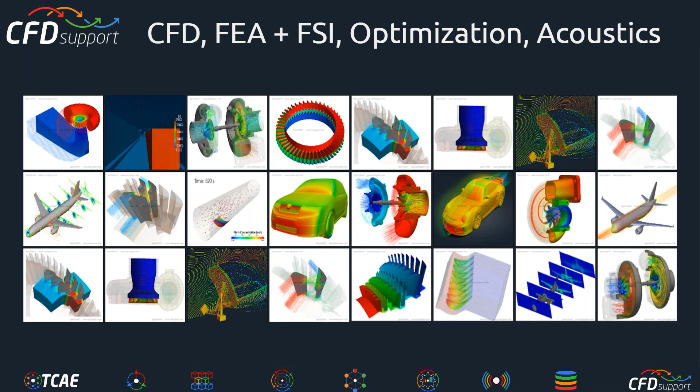So definitely, you are in the right place here if you want to follow some of CFD, FEA, FSI, optimization, and acoustic simulations. Today's webinar is dedicated to optimization. It's a specific field where typically a lot of simulations are run, and the best results or the best lessons are taken out of it.

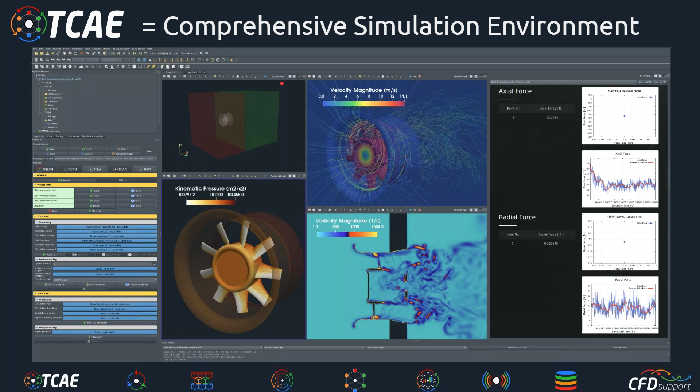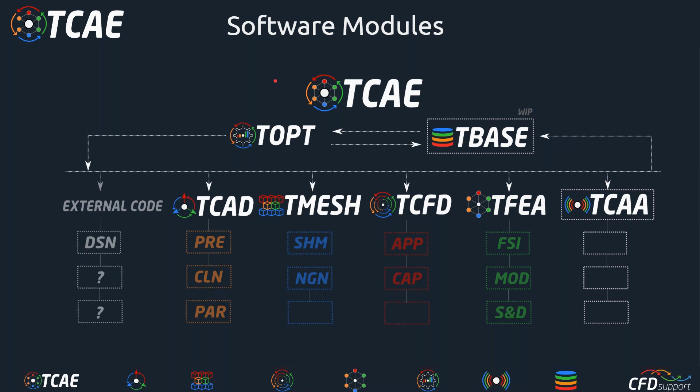Our flagship product, the software, is called TCAE. We develop it here, and we provide it to the users. It's a comprehensive simulation environment, which is basically a tool, a CFD code, which allows all these kinds of simulations. It consists of several software modules, and the modules can communicate with each other and provide everyone a very flexible set of tools.

Its benefit is definitely that every user can set the workflow which fits his skills, experience, and resources to deliver the results in very high quality, and it's very flexible. Software is unlimited. There are no limitations on the number of users, job cores, hardware installations. Users can scale their resources to the fullest, and there's a wide range of licensing options and ways of using this software. So it's very flexible also in these terms.

As already mentioned, it's focused on turbomachinery applications and external aerodynamics. That allows the software to be accurate and really useful, because it's not a software for everything. It's dedicated to specific fields where it can be very efficient. It's accurate, it's automated, and it's very modern software, because it was created with the intention to give the best to the users in terms of these features.

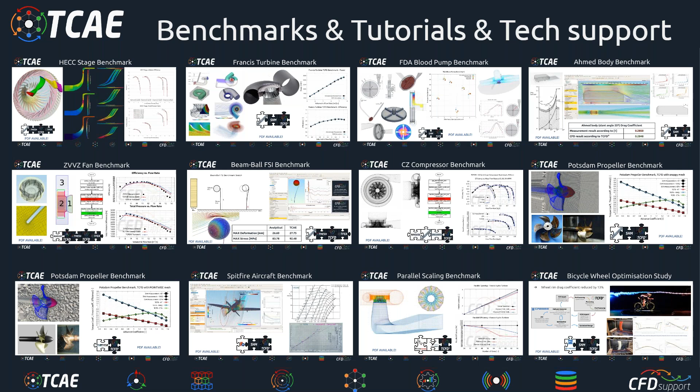There are a lot of benchmarks based on real projects we did in the past with real customers. We masked the details, and we were allowed to use them as benchmarks. We compare the simulation data with real physical measurements. That's very important because all the users care about accuracy. There are a lot of tutorials available, and we have very good technical support, which is our specific focus, and it's in the name of the company after all.

The software can be used for remote computing very well. It can be used on a laptop, PC, desktop, cluster, or cloud. It can be used remotely from home or from the office in Windows or in Linux. It has unique client-server options. It can be run locally but simulated on the server. So it's very modern in these terms.

It's based on open source. It's very important that we do not develop everything from scratch. We use the important open source pieces available in the market. We have mastered the ability to process and integrate these open sources into our simulation environment. And we have spent many years on top of open source projects. So this already is a value itself, because a lot of effort has been spent to deliver this software.

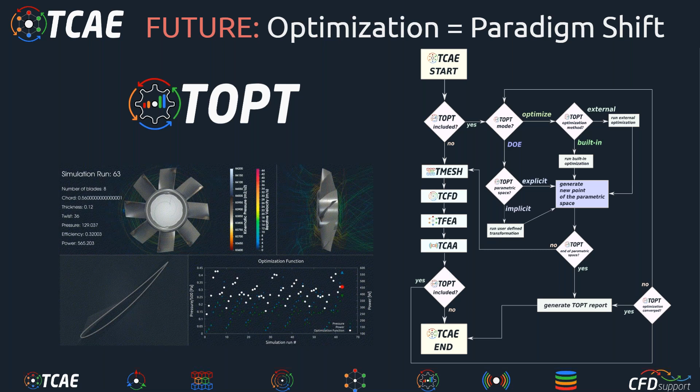Currently, the version is 24.03. The latest version is version 2 of 24.03, and we will release it very soon, perhaps next week. For the future, we have a couple of goals. We will definitely focus on optimization and develop it further, and we believe it's a very promising feature for the future.

We will also focus on acoustic simulations. The module will be developed further. It's being developed very quickly, and it's again very promising. In the next webinar, we will introduce the new benchmark, which is again very useful and opens the door for a lot of new simulations of fan acoustics.

And lastly, we are developing a new simulation software module called T-Base, which will help create large databases of results and allow users to employ machine learning and create their own surrogate models. It's very promising, and we will introduce it a little bit later.

Okay, so today's topic is optimization. I'll say a little bit about what I think is important about optimization in CAE. We believe optimization is pretty much a paradigm shift, a really big change throughout the field, because in the past it was basically a trial and error method. We created the simulation, ran it, and looked at the results.

This was an iterative process. We changed one parameter, two parameters, looked at the results, and then we hesitated about what the cost of the change was, etc. So it was a relatively painful process, pretty manual, and we sometimes call it the trial and error method. We tried something and saw what was good or not good, and then we decided the next step.

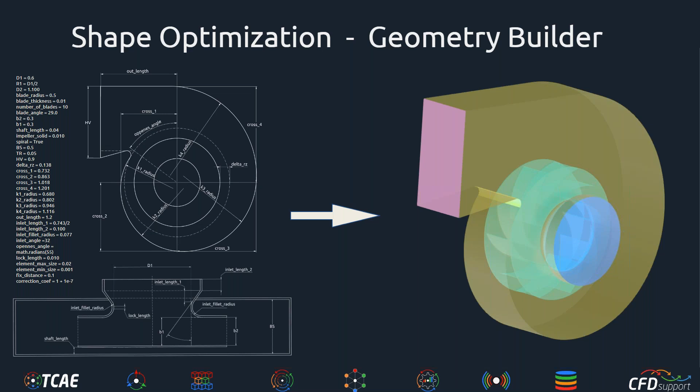That surface needs to be created somehow, and it needs to be discussed a little bit in parallel, because every engineering office, every research department, has different pictures and parameters, so it's impossible to generalize. The geometry builder, if needed—and for most optimization loops it is needed—has to be discussed in parallel with the optimization project.

A little disclaimer here: any optimization project brings quite a lot of new complexity into an already complex problem. So it's not something you begin with if you're just starting CFD or FEA simulations. Optimization should come on stage sometime later, when you already know how to run your simulations and are confident about your results. Then optimization makes sense to run in full scale. It's relatively complex and needs some experience involved.

For optimization, in our software environment, the TOPT module is responsible, which works in several modes. It's a software module that adds to the standard workflow—typically meshing and CFD simulation—and that's pretty much it. It adds additional steps. It can create a simulation loop where a lot of simulations are done, and it allows users to run simulations in several modes.

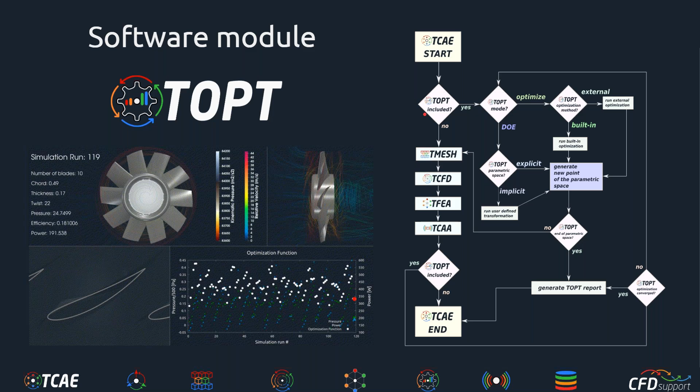We have—perhaps we'll talk about it later—two optimization methods. The first is called the golden-section search algorithm; there are references for it, and it's relatively simple and quick. The other optimization method is called DIRECT, and again the theory is available. It's an alternative, more complex, takes more time, but it can handle more wild optimization functions.

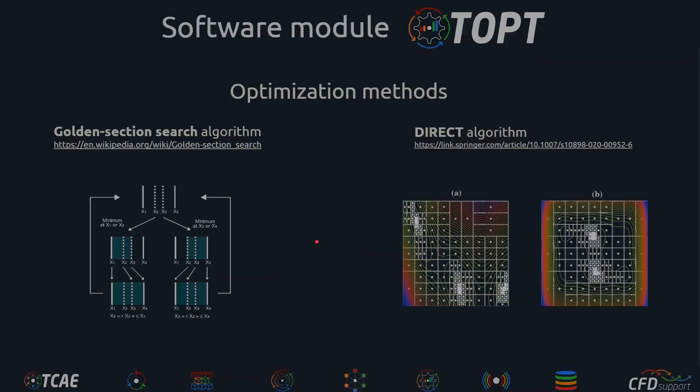Okay, so we did a couple of case studies of this optimization workflow. The first one we'd like to talk about is also available on our website, with all the details. So I will just mention what I find important about it.

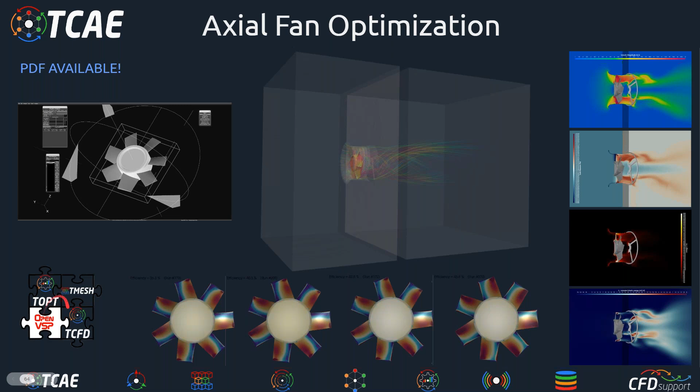It's axial fan optimization. We created a simple geometry builder in OpenVSP, so you can send the parameters there. Actually, TOPT can do that, but you can also do it manually. And OpenVSP brings back the surface geometry.

Based on this geometry builder, we created a loop which allows us to run simulations like this. So this is the loop for this particular case study. We start the simulation, the first initial mesh is created for the baseline simulation, then the simulation is done, and the optimizer decides what will be next. Based on the rules we preset, it generates the new geometry, creates the mesh, and runs the new simulation.

That's very important, that's why it's simulation driven, right? Because based on the previous results, the next set of parameters is decided. A new point in what we call parametric space is created, and then again and again - it's a results driven, simulation driven optimization being run.

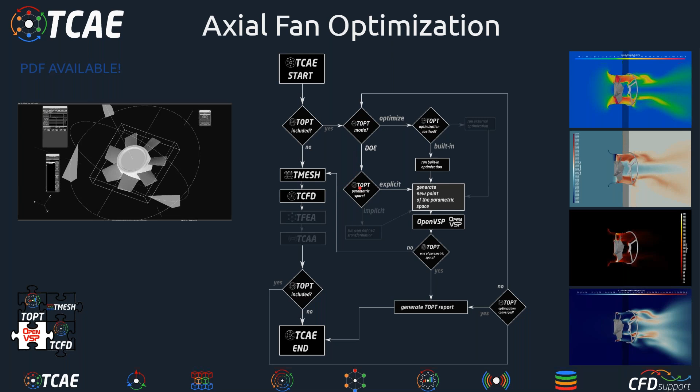And as a result, here's a little animation. We ran something like 300, maybe 400 simulations with, I think, five parameters that changed within a certain bandwidth, and the simulation ran and iterated towards the best - I think it was the efficiency. The efficiency was the goal.

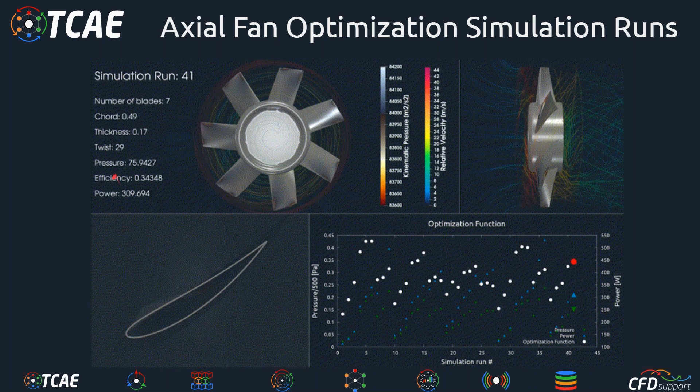And we did a similar case study with a centrifugal fan. I'm not going to go into the details, but I'll just show a little animation of how the simulation can be visualized at the end. Every little white point is a single simulation. In the beginning, the optimization engine is exploring the parametric space, and then it starts the real optimization, iterating towards the best efficiency point, which, by the way, in turbomachinery is very often the optimization function.

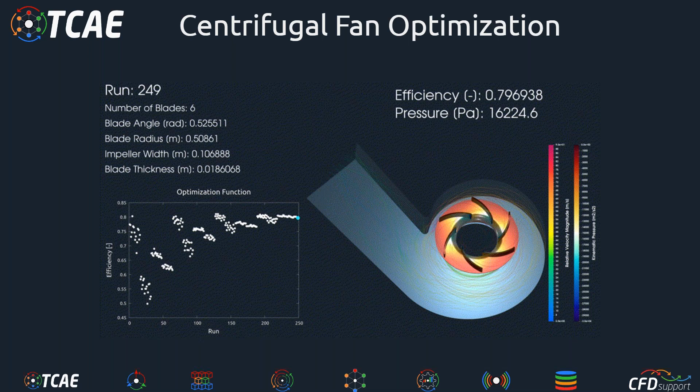The objective function is set because efficiency is something we look for in most turbomachinery applications. So, centrifugal fan, and similarly we did this for the blade propeller of a drone. I guess this was - well, Salome, I'm not sure, maybe it was still OpenVSP again. The geometry builder created it - yeah, it was OpenVSP for sure. It created the geometry, and again, pretty much the same story: it iterated towards the best efficiency.

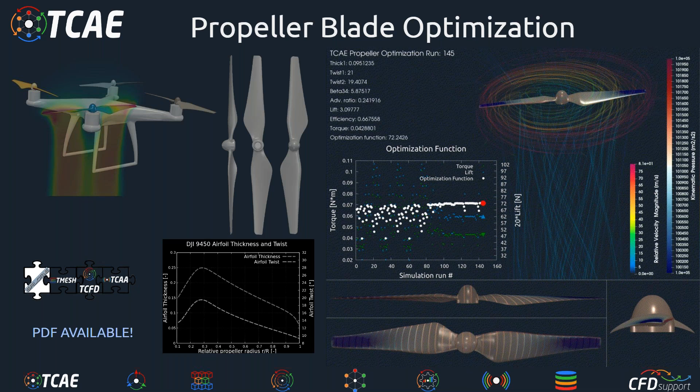We also have one example - I don't know, maybe Radek will talk about it or not. Anyway, it's not necessary to run the optimization loop over new geometries; you can also be looking for something else. For example, in this case we created a workflow where we were looking for the maximum lift coefficient of an airfoil. For this selected airfoil, what was changing was not the geometry but the angle of attack. So we were looking for the angle of attack for which the lift coefficient is highest, maximal. It's as simple as this.

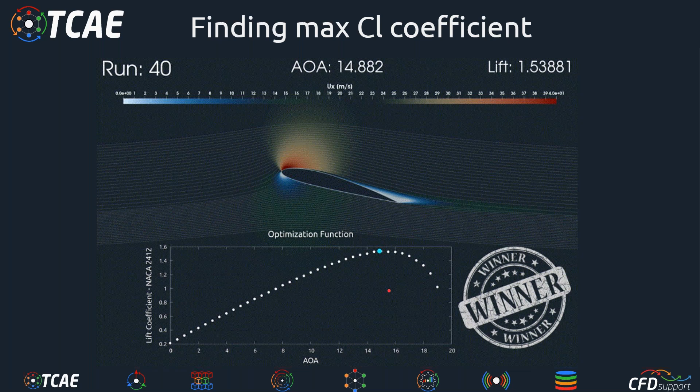I guess this is still the DOE, and now it starts iterating around the design point candidates, and then it determines the winning design, or the angle of attack.

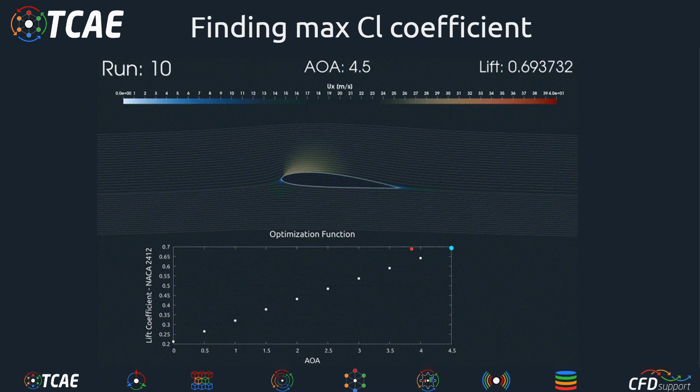Before I switch the presentation to Radek, I'll finish this general part with an idea that resonates with me in the recent period: the technology - here I mean the software, the workflow, the scripts, and everything you use - is just 40% of success. It's the smaller part of the success, or of the quality of the results you produce in any CAE project.

The rest is knowledge and effort. Knowledge is skills and experience. Your effort is your patience, your dedication. That's the bigger and far more important part in any project, in terms of quality of results and success. It's how you use it, with what effort and what knowledge - that's definitely more important than the technology. Technology is great to have, but it's the smaller part of the business. That's what I'm sure of.

Okay, I'll definitely stop here and switch the presentation over to Radek. Let me see if he's still there. Yeah, I'm still here. That's great, Radek. The stage is yours - we can see your screen.

Yes, perfect, thank you. So Luboš showed us several examples we did in the past, all showing some possibilities of what can be achieved with TCAE, and particularly the optimization tool. Now I would like to show you some practical examples, so I took two examples.

One is the simpler optimization where you do not have any geometry builder. So this will be just simple optimization of flow parameters or CFD parameters itself. So it doesn't require any external tool for geometry generation or any parametric model. So then we will show how to enable the optimization and how the optimization module TOpt looks like.

And then on a simple example, we will show what should be managed or changed when we would like to do the geometry optimization. So we will not go for a general or complex example like radial fans, pumps or whatever, because I think Luboš mentioned it, but I would like to repeat and emphasize that before you go for the optimization, you need to master the first step, so the mesh generation and CFD setup.

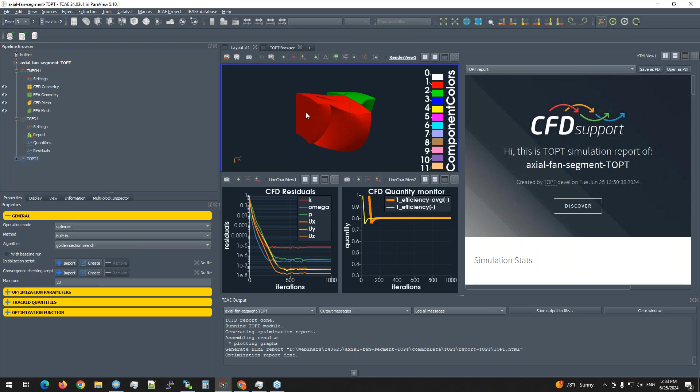So first of all, we will show the example of the simple axial fan geometry in a segment shape. So we just simulate the segment of the rotor and stator part of the axial fan. And here we would like to, for example, find the best efficiency not only for the range of flow rate, but also for the range of RPMs. So this cannot be achieved easily by DOE or by our guesses of the parameters, always checking the efficiency.

So let's look how to find the best efficiency point for two parameters, flow rate and RPM, so speed of the rotor. So at the beginning, you need to have TMesh and TCAE perfectly set up. So you need to run the simulation several times and check the mesh parameters. When the mesh is okay, then you go for the CFD simulation setup, which is the same as for all the other setups we presented in our previous webinars.

So you set the standard parameters, and then you focus on the optimization. So mainly you need to focus on boundary conditions. So if you would like to go for combining the volumetric flow rate and RPMs, you need to have at least these two parameters set following the optimization. So we have some base RPMs set in the standard CFD simulation, and then we have the volumetric boundary conditions.

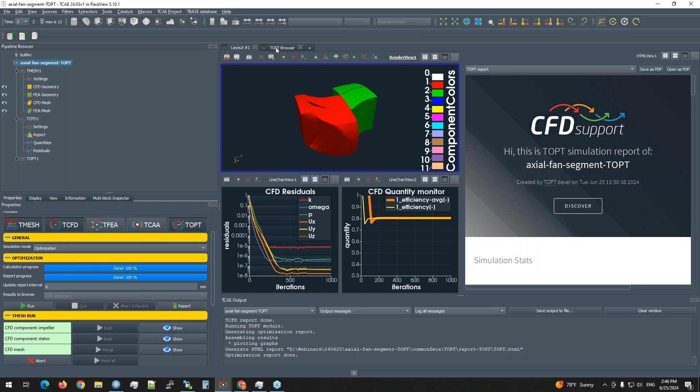And then when you run it, you simply run the optimization by the run all button, and then every step, every simulation is run, and during the optimization loop, you can follow every result you will have. So after every parametric point in the space is evaluated, you can check the results, or even you can generate the report which will show you the current state of the optimization.

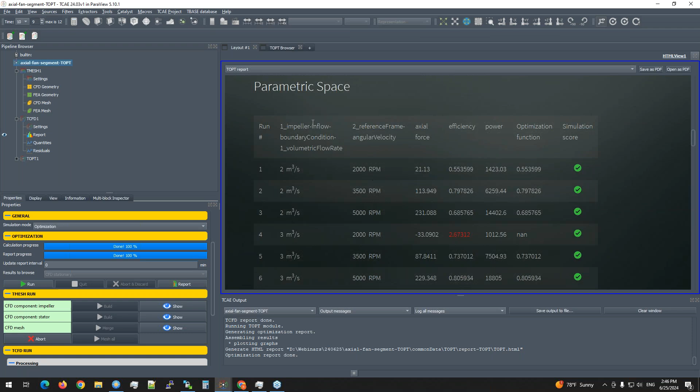So you can then read how many runs were run and all the results for each point in the parametric space. And for example, here the 4th point with the RPMs 2000 and the volumetric flow rate of 3 cubic meters, we have the efficiency more than 2. The axial force is also negative, so it shows us that this combination of parameters is out of the working range of the axial fan, and basically this point is excluded from the optimization loop, and the same holds for the other points.

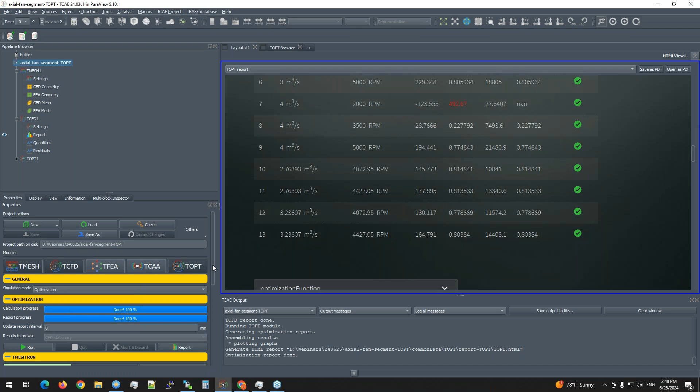The first 9 points, as we can see, were simulated with the DOE, and then from the 10th point, the optimization loop starts and it iterates towards hopefully the best efficiency point, because golden section search looks for the local maximum. So it depends again on the wildness of the optimization function, what you would like to use. With golden section search, you save time because it's simpler, but if the optimization function is expected to have several local maxima, then you need to go for the more advanced optimization algorithm.

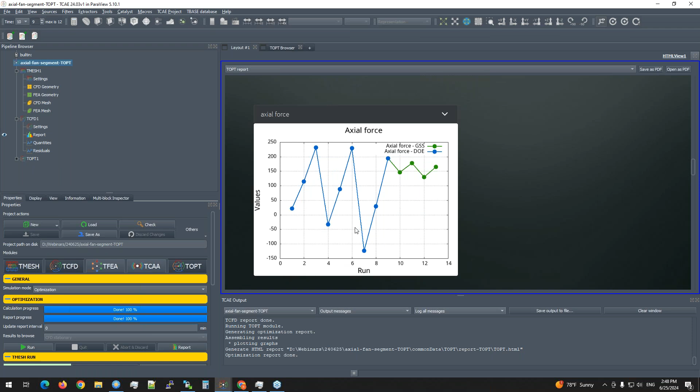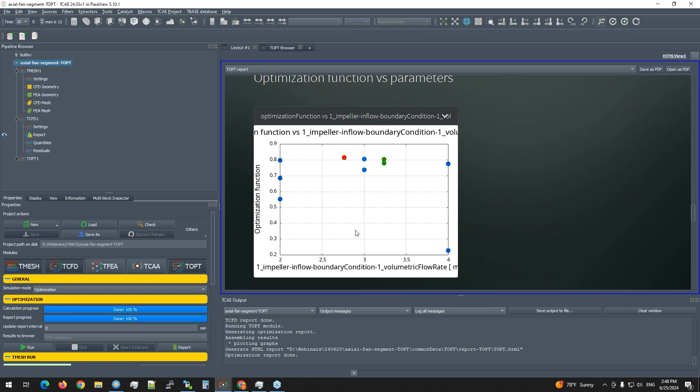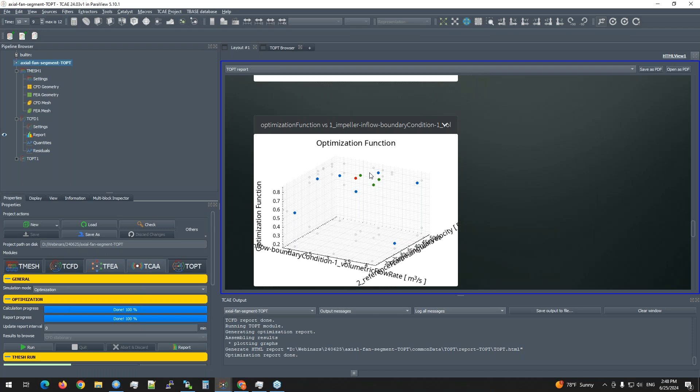And at the end, you can follow your tracked quantities and optimization function for each simulation run, and of course you have a summary of the best efficiency point, so which point was the best one, and the combination of the parameters and resulting tracked quantities. And then you can follow the graphs of each parameter with respect to the tracked or optimization function. And you can also see these 3D graphs, so the dependency of two parameters.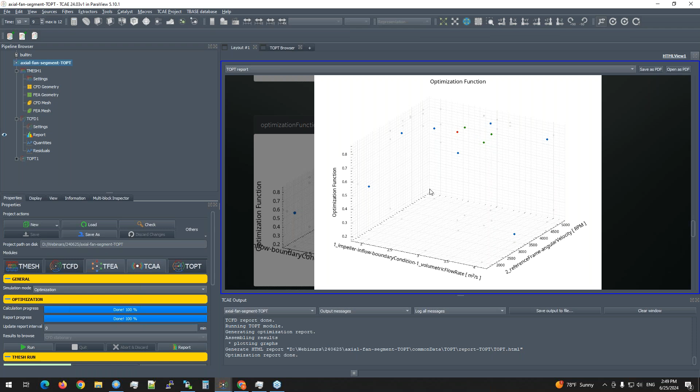If I enlarge it, we have here angular velocity, here we have volumetric flow rate and the values of the optimization function. The green dots are the optimization results, the blue ones are the results of DOE, and the red one is the best efficiency point. Yeah, and this way you can optimize what you want with a simple setup of the optimization module.

Okay, so let's move to the more complex optimization. So here we have again a simple example of geometry optimization. We have a simple bent pipe with 3 cross sections, and we can adjust the radiuses of these 3 cross sections of the piping system. This is one of the best points, but if you choose another simulation point, there are 3 cross sections, as I said, and we can manage the radiuses. And the optimization is set to find the best efficiency, which is just the lowest pressure drop for the flow in this pipe.

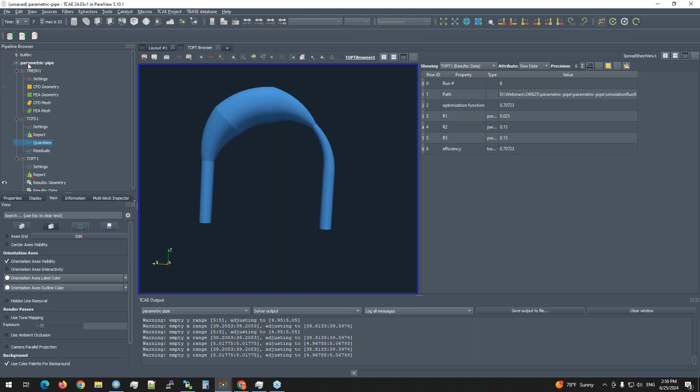So again, you start with a simple setup of the T-mesh and TCFD modules. You typically load some initial geometry of the piping system. You set the mesh, you adjust the CFD parameters you would like to follow. I think here we have the flow rate or inlet velocity, it doesn't matter. And then in T-opt, we would like to connect some kind of external tool which generates these variations of geometries based on these three parameters.

So just to show you how it looks, if I go to the webinars, today's webinar, and here is the parametric pipe. So typically you have a folder with the external tool. Here it is a simple Python script which reads the 3 values of the radiuses, and this Python script creates the STLs with the given shape.

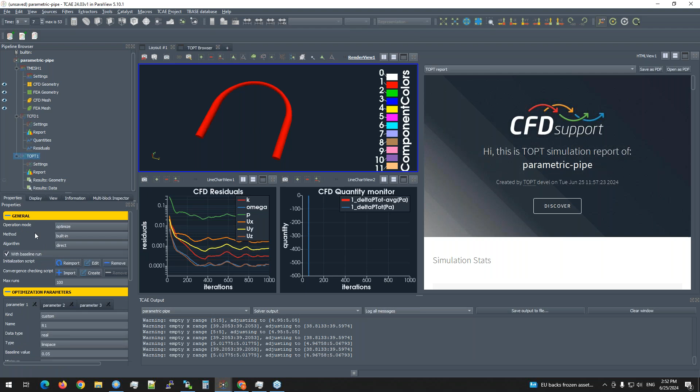So this script reads the 3 parameters of the cross sections R1, R2, R3, and basically generates the STL here into this folder. So it generates the inlet, outlet, wall, and even for optimization based on the finite element method, it also generates a solid for the piping system. But this is not part of this example. So again, if you go to the T-opt module, you can choose your operation mode, method, and algorithm. So here, as an example, we have a direct.

Here you have the possibility to include the baseline run, which is typical when you start an optimization where you would like to optimize some existing geometry. So the existing geometry is the initial state, and the other results will be compared with respect to the baseline run. So for example, you have some pump design, and you need to improve it.

So you have this baseline geometry, and the geometry builder will then adjust the parameters by some relative values to optimize your current baseline run. So therefore it's important to have the information about the CFD parameters of your initial state.

So this is it. And what's new compared to the previous example is that you need to create the initialization script, which connects the optimization parameters with the external tool, and runs the external tool to generate a new set of geometries, to create a computational domain from the new set of geometries and run the CFD simulation.

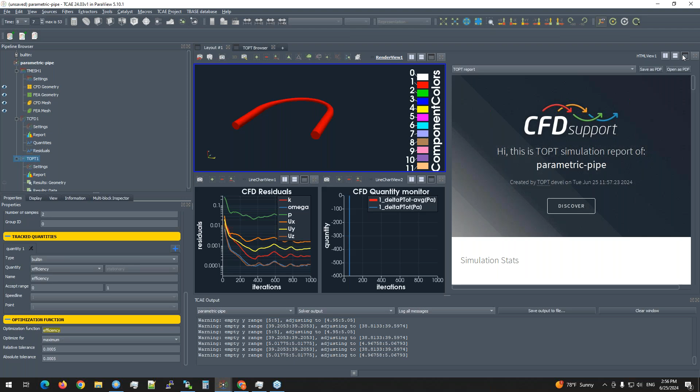And then again you define the tracked quantities like efficiency here, for example, or the total pressure difference. You set the accept range, you set the optimization function, and again run the loop, and as a result you will see the TOpt simulation report, where you see how many runs were run, and all the information about the parametric space, so about the baseline and all the other results depending on the combination of your parameters.

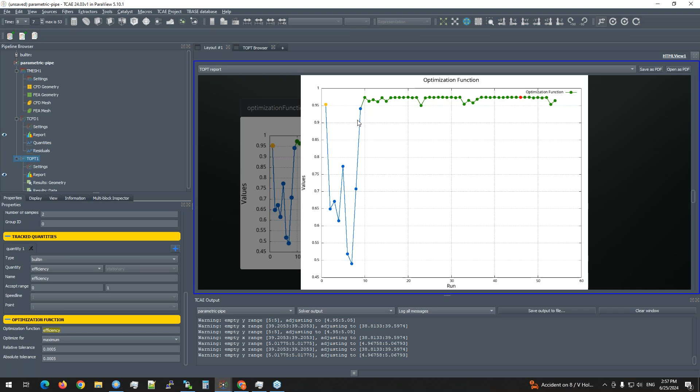And at the end you will see some kind of dependency like this, and of course you will find the best efficiency point, and then you can explore the parametric space and the influence of each parameter on the optimization function. And then, based on the results, you can decide what will be the next step, or if you are done with the optimization.

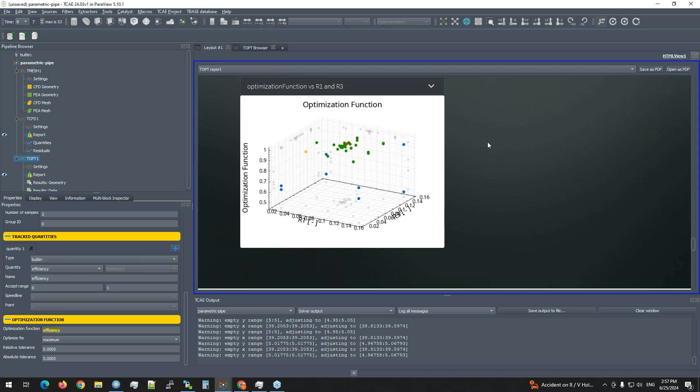So these are the main principles, and basically all the other applications you can find on our web pages, like this centrifugal fan or axial fan optimization, which Lubos already presented. So the principles are very much the same. The connection is done with the external tool, and then you run the optimization in a loop.

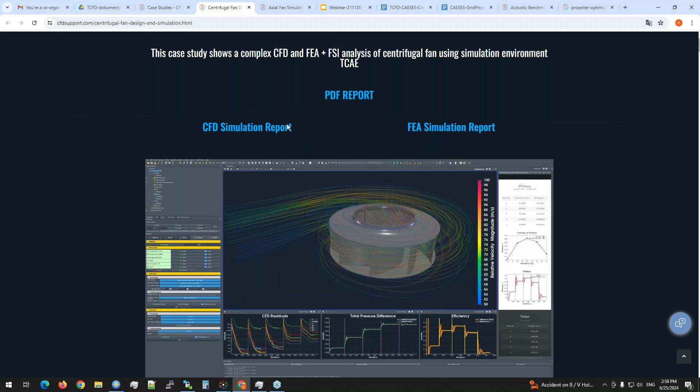So we have run several such optimizations in the past. Like for this centrifugal fan, we have this axial fan geometry variation and optimization. We also did some kind of optimization with CF Turbo, to optimize the radial pump. So this was a pretty extended optimization project with hundreds of loops, really to explore the parametric space based on, I think, 5 or 6 parameters.

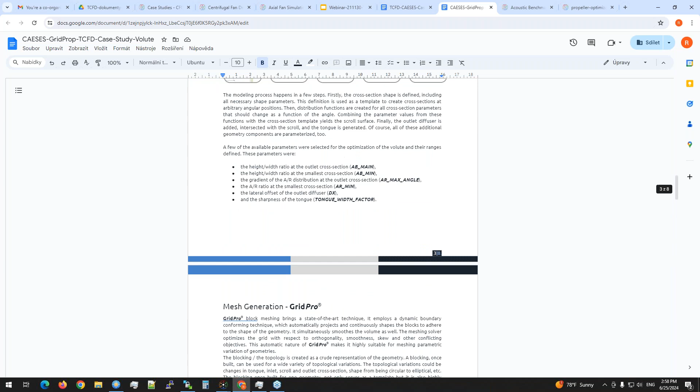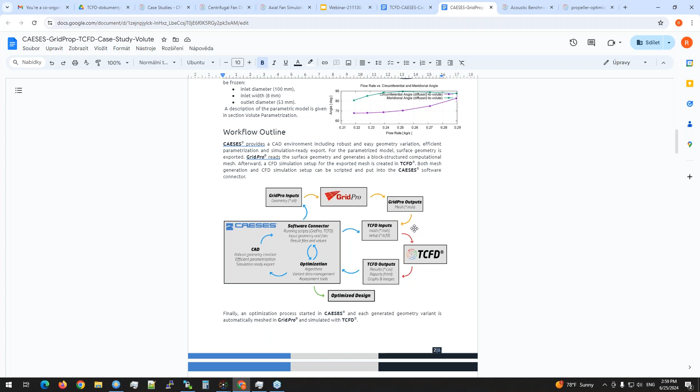We have some joint projects with the Friendship Systems, and also together with Friendship Systems and GridPro, which proves how TCFD is flexible to be incorporated into any workflow, and really to combine several external tools for some really advanced applications with higher added value for all the parts of the workflow.

And the last one, yeah, we also did some acoustics simulation, for example for the DJI propeller, and on this we also do the optimization based on the geometry, but this can be also for the future. We are planning to have some kind of optimization with connection to the acoustic parameters.

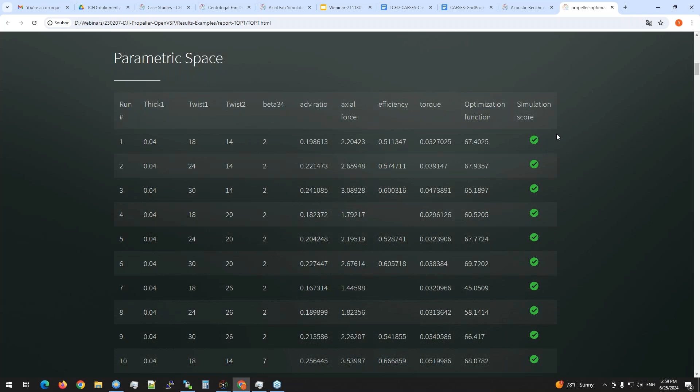All right, so I think I said what I wanted, so maybe now we can go back to Luboš, and maybe Luboš will add some additional information, or we can go directly to Q&A. So Luboš, can you take over the presentation? Absolutely, Radek. Thank you very much. Thank you for your contribution. It was again very informative and very interesting.